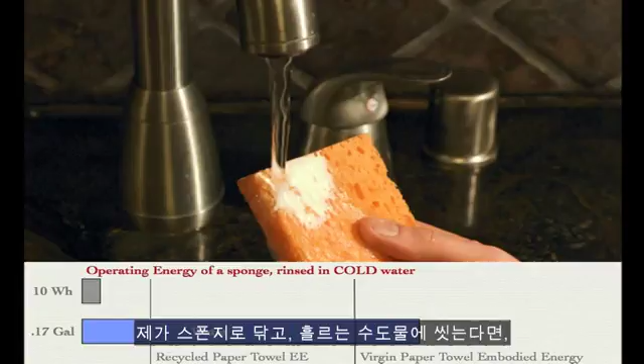Screw the paper towels. Let's go to a sponge. I wipe it up with a sponge, and I put it under the running water, and I have a lot less energy and a lot more water. Unless you're like me and you leave the handle in the position of hot even when you turn it on, and then you start to use more energy. Or worse, you let it run until it's warm to rinse out your towel. And now all bets are off. So what this says is that sometimes the things that you least expect, the position in which you put the handle, have a bigger effect than any of those other things that you were trying to optimize.

Now imagine someone as twisted as me trying to build a house. So that's what my husband and I are doing right now. And so we wanted to know, how green could we be? And there's 1,001 articles out there telling us how to make all these green trade-offs. And they are just as suspect, telling us to optimize these little things around the edges and missing the elephant in the living room. Now, the average house has about 300 megawatt hours of embodied energy in it. This is the energy it takes to make it. Millions and millions of paper towels. We wanted to know how much better we could do.

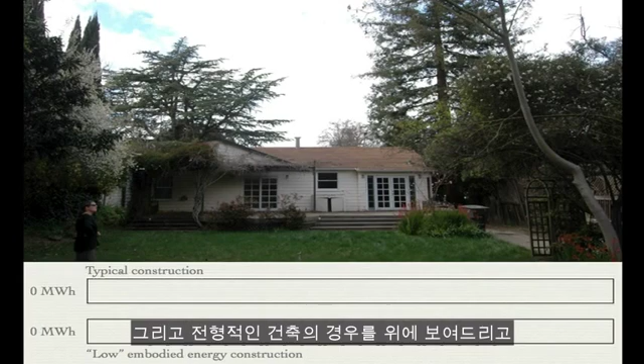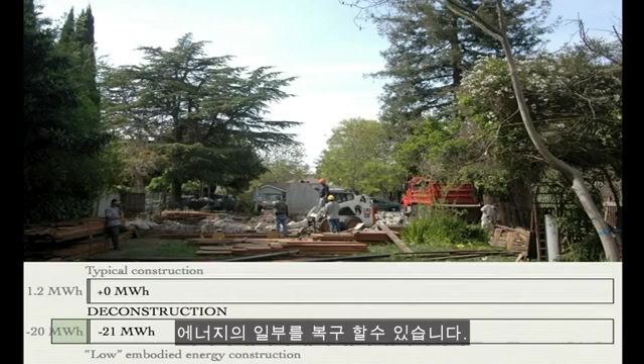And so, like many people, we start with a house on a lot, and I'm going to show you typical construction on the top and what we're doing on the bottom. So first we demolish it. That takes some energy, but if you deconstruct it, you take it all apart, you use the bits, you can get some of that energy back. We then dug a big hole to put in a rainwater catchment tank to take our yard water independent. And then we poured a big foundation for passive solar. Now you can reduce the embodied energy by about 25% by using high fly ash concrete.

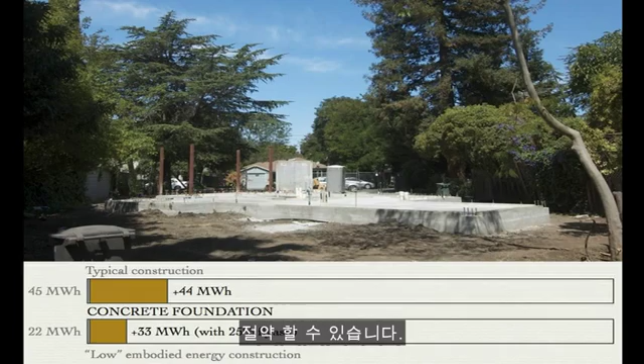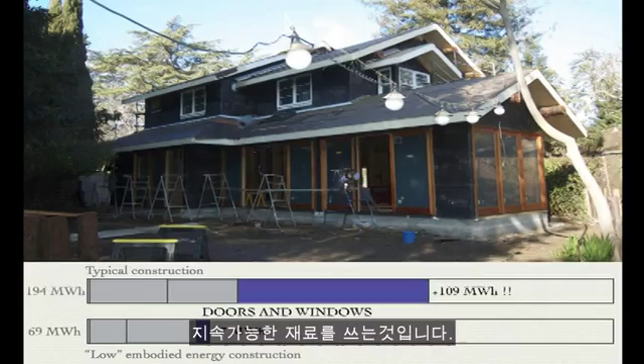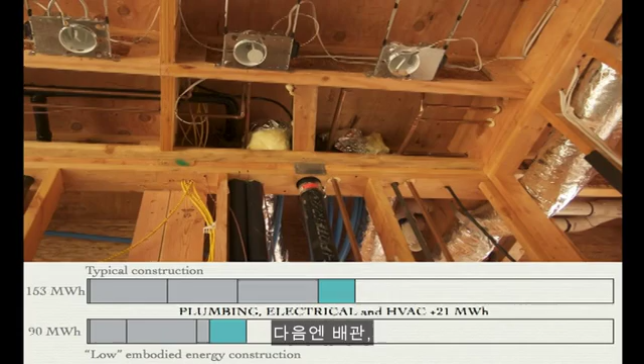We then put in framing. And so this is framing, lumber, composite materials. And it's kind of hard to get the embodied energy out of that, but it can be a sustainable resource if you use FSC certified lumber. We then go on to the first thing that was very surprising. If we put aluminum windows in this house, we would double the energy use right there. Now, PVC is a little bit better, but still not as good as the wood that we chose. We then put in plumbing, electrical, and HVAC, and insulate.

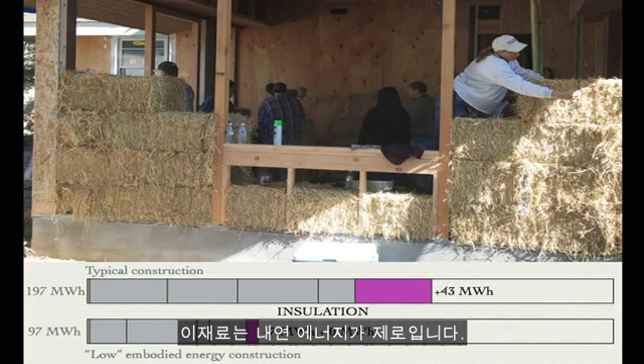Now, spray foam is an excellent insulator. It fills in all of the cracks, but it is pretty high embodied energy. And sprayed in cellulose or blue jeans is a much lower energy alternative to that. We also used straw bale infill for our library, which has zero embodied energy. When it comes time to sheetrock, if you use EcoRock, it's about 1/4 of the embodied energy of standard sheetrock. And then you get to finishes, the subjects of all of those Go Green articles.

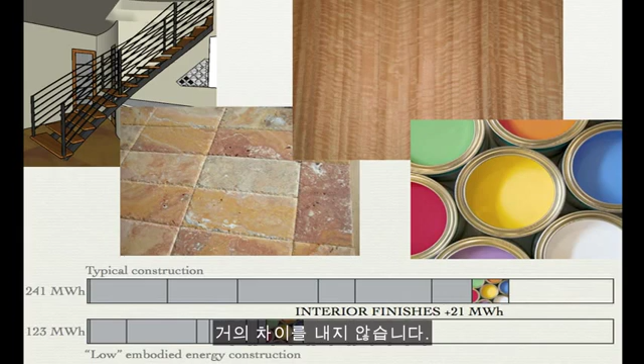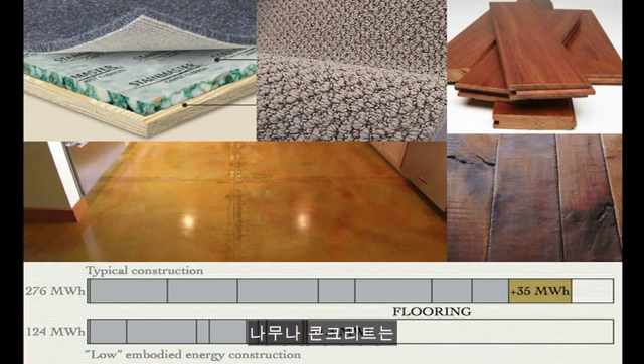And on the scale of a house, they almost make no difference at all, and yet all the press is focused on that, except for flooring. If you put carpeting in your house, it's about 1/10 of the embodied energy of the entire house, unless you use concrete or wood for a much lower embodied energy. So now we add in the final construction energy, we add it all up, and we've built a house for less than half of the typical embodied energy for building a house like this.

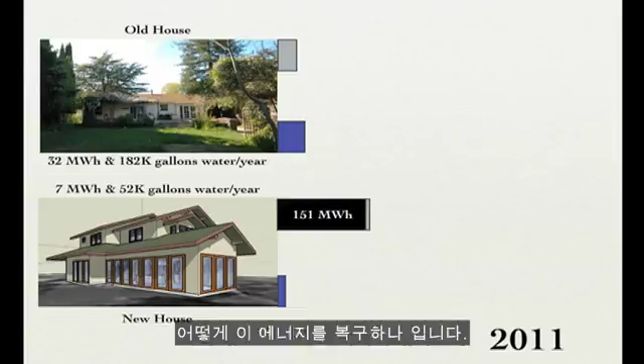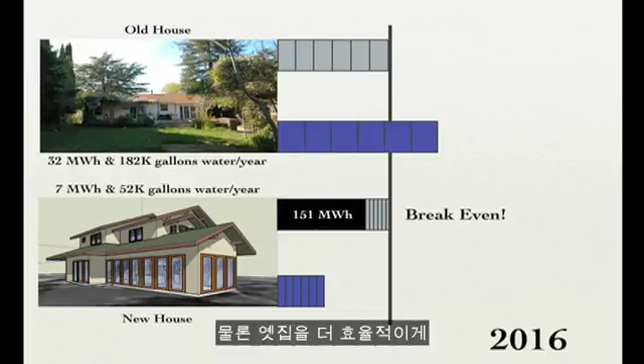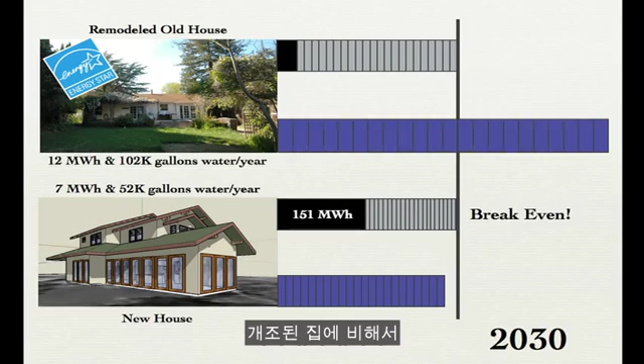But before we pat ourselves too much on the back, we have poured 151 megawatt hours of energy into constructing this house when there was a house there before. And so the question is, how could we make that back? And so if I run my new energy-efficient house forward compared to the old non-energy efficient house, we make it back in about 5 years. Now, I probably would have upgraded the old house to be more energy efficient, and in that case, it would take me more like 20 years to break even. Now, if I hadn't paid attention to embodied energy, it would have taken us over 50 years to break even, compared to the upgraded house.

So what does this mean? On the scale of my portion of the house, this is equivalent to about as much as I drive in a year. It's about 5 times as much as if I went entirely vegetarian, but my elephant in the living room flies. Clearly, I need to walk home from TED. But all the calculations for embodied energy are on the blog, and remember, it's sometimes the things that you are not expecting to be the biggest changes that are.